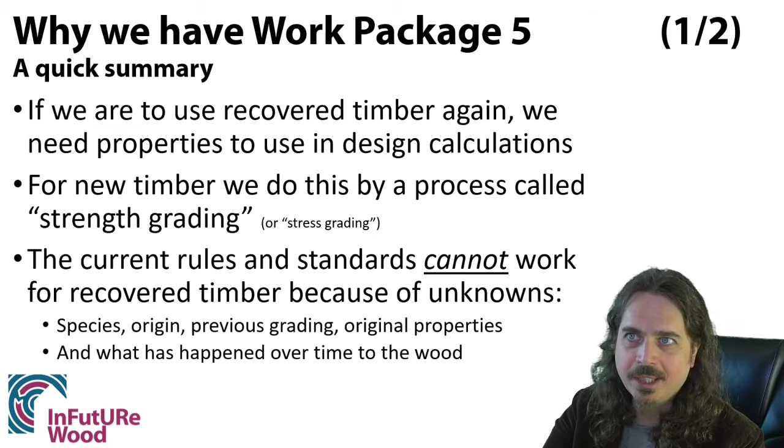But there are some related issues as well. First one is that it's currently very expensive to establish new grading rules for a new species or new source, or even a new grading machine. And this acts as a barrier to get a wider range of different species into the industry. The reason for this is that we require very large testing programs to establish the grading rules.

And if it's a minor species or a small source, sometimes that testing program can be a significant proportion of the wood that we want to use, and obviously that's not an economic thing to be able to do. So at the moment the grading rules that we have are acting as a barrier to get a new, more diverse range of first use timber into construction too.

There's also no current easy way of assessing timber in situ to give values for structural calculations. Now, obviously this happens because we have to do it, but the problem is that it's a bit more of a seat of the pants process than it ought to be. There's no real kind of good framework for it.

Because of that, we have to be careful what we're doing, and perhaps sometimes be a bit over-conservative, which sometimes means that we either can't keep the timber in service, when in reality it would probably be fine, or we have to put in some extra strengthening that might not be needed. So it would be good to improve this whole issue around retaining timber in buildings, because if we have that option, it's probably the best thing to be able to do for the circular economy, is extend the lifespan of the timber that's already being used.

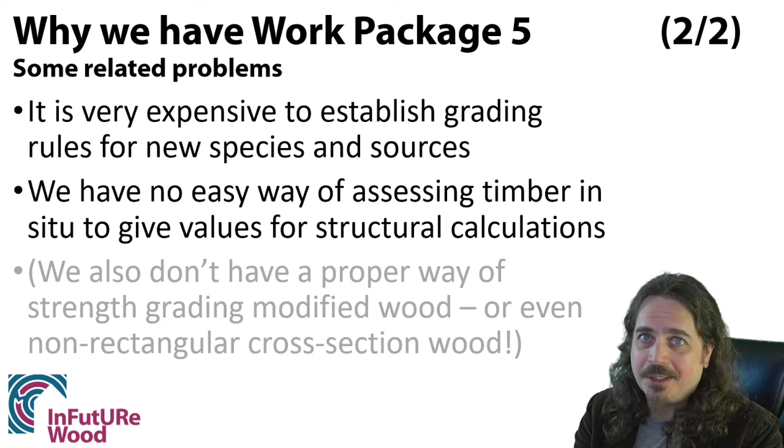So there is on-demand webinar content, and if you're watching this video, then I guess you know about that. And I recorded earlier a video presentation about the other ways in which strength grading can get in the way of the circular economy, including things like increased focus on a smaller number of species and ever decreasing number of strength classes on the market.

I talked a bit about how when you go to these commodity strength classes, you actually discard some of the potential of the wood, and sometimes you're not putting things on the open market and it doesn't actually make sense to discard the timber potential. And how sometimes the whole process of grading makes us think incorrectly about it, and that leads sometimes to over-specification, which is another circular economy issue, in that we're using or specifying wood that is actually way better sometimes than it actually needs to be. So watch that video if you're interested in those topics.

My other colleague at Edinburgh Napier University, Marlene Cramer, has made a couple of videos on other aspects of grading recovered wood, which are touching on things like the more practical issues, and things like the equivalent of visual override that you would need, and the things that you find in recovered wood that you don't find in new wood, like holes, fasteners, notches, non-rectangular cross-section, mechanical breakages, things like that.

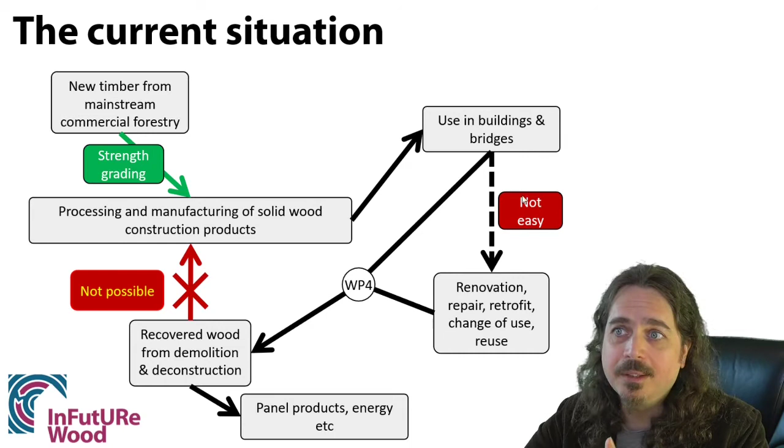And then when buildings and bridges get demolished, the wood is collected at the moment, but it's mostly going to either panel products or energy, because there is no linkage back from the recovered wood to manufacturing of new construction products. So at the moment this bit is missing. This process of grading again the wood or assessing again the wood is missing. And as I said, this process here of inspection, it happens, but presently it's not easy.

So this is the situation that we would like to get to, is to get that linkage in, so that we can take recovered wood from deconstruction and we can assess the properties well enough that we can manufacture new products from it, new construction products, and use them safely. So that's the thing that we want to improve with this work package and this project, is to improve the segregation and grading of secondary wood to get it back into new products that are a higher level than the panel products that are currently going, so that we can extend the service life of the wood, increase the number of cascades in the material cycle.

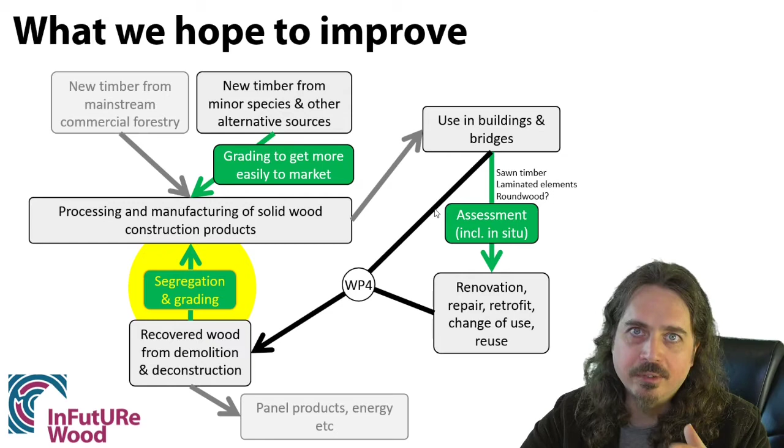And we also want to improve this grading process for minor species and other alternative sources as well. It's kind of a linked problem, and if we can solve this issue down here, then we can probably solve this one too, hopefully. And part of the project is to improve this in situ assessment of wood already in service, so that we can improve it and retain more wood in its first use for longer.

So if you're interested in the topic of in situ inspection, I would encourage you to watch this other on-demand video by my research colleague in Madrid, Guillermo, and he covers the topic of inspection, estimation of properties, calculation of load carrying capacity, and presents a case study. So if you're interested in that topic, I'm not going to talk about it much in this video, so you're probably better off watching that one.

Okay, so a little bit about grades and strength classes and design values. They're not quite the same thing as each other, so let's unpick this issue. So when we grade timber, we sort it into grades, and grades are really just sets of pieces. So we can sort timber into a pile that says this is a good pile, and another pile that says this is a bad pile. And those two piles are called grades. They're just sets of timber. There's nothing else attached to them other than that they're just piles of timber.

Grades are linked to strength classes, so you need to get to a strength class in order actually to have some design values to use in your calculations. So strength class is a special case of a grade. It's a grade with some numbers attached, some description of the properties of the wood collectively in that pile. Now, strength classes, they're a convenient way of listing the design properties, but it's not the only way. You could just list the design properties, because at the end of the day, what you need is the design properties. It's not the strength class.

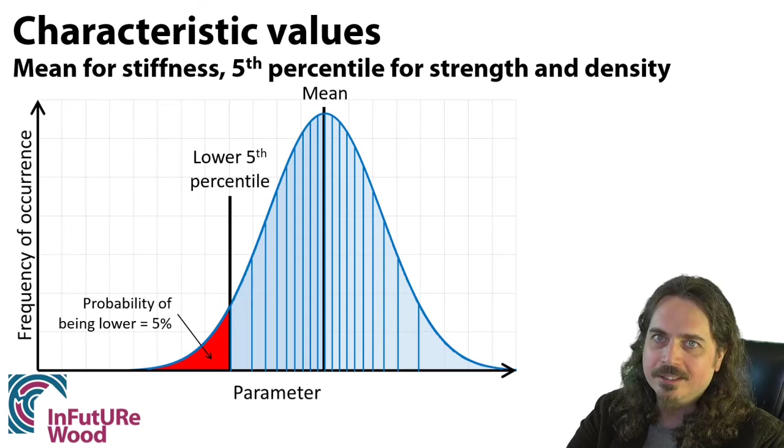So if you're designing timber, you would be familiar with the list of design properties in EN 338, the European standard that lists the properties for the C, D and lately tension classes. There are other strength classes too that don't appear in EN 338, but the main ones are the C classes and the D classes that would be used in construction. That's where you find the properties. And there are three primary properties highlighted in the standard: bending strength, the mean stiffness in bending, and the fifth percentile density.

All of the other properties are called secondary properties, and they are usually estimated conservatively from equations based on the primary properties. And you find those equations in EN 384, a whole bunch of equations that say, given certain strength, density, and stiffness, these are what all the other secondary properties are. That's not quite all of them, so you will find in Eurocode 5 a few other properties that are calculated. For example, from density, you would get embedment strength.

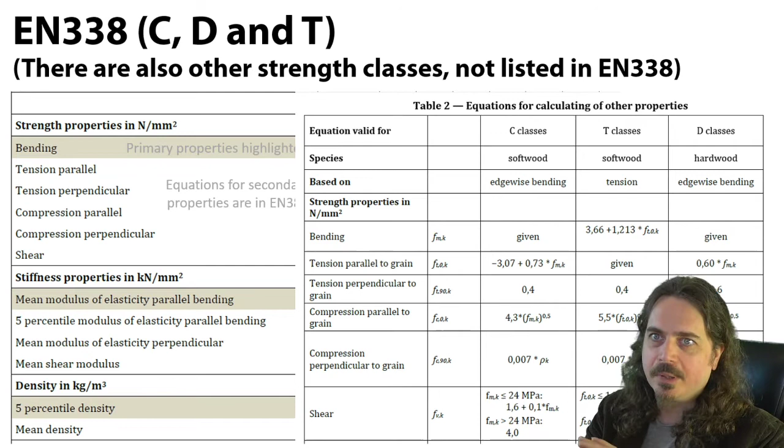So yeah, you've got certain strength classes, and you would just look up what strength class you've got. These are the design values that you can plug into your calculations. Pretty easy to use. That's the whole idea of strength classes, is that you don't need to know where your timber is coming from or what species it is. You can just say, I did this design for this strength class. As long as the timber is this strength class, the design is fine. I don't care where you get it from. So that's the whole point of strength classes for new timber.

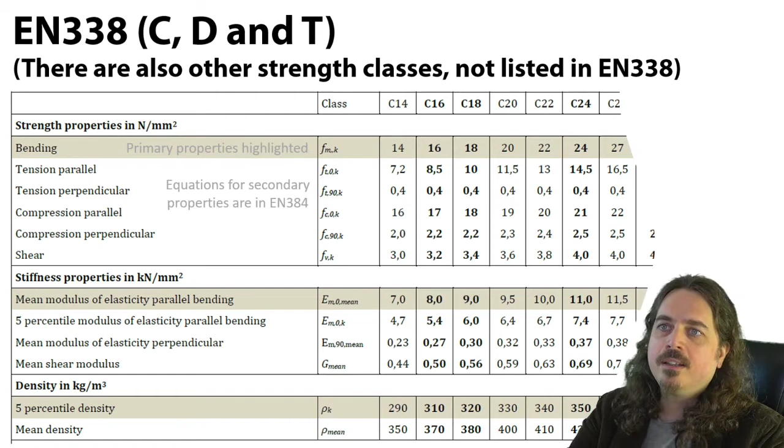So why do we have this problem with the current grading standards? Why are they not suitable for recovered wood? Well, the reason is that the grading standards have to work with the old technology. So everything has to be backward compatible for new timber, because these old machines are still in use in the sawmills. So for visual grading, the rules have to be simple. You're just sorting timber into grades according to specified criteria. You can't adjust those criteria, it's just sorting and applying the rules.

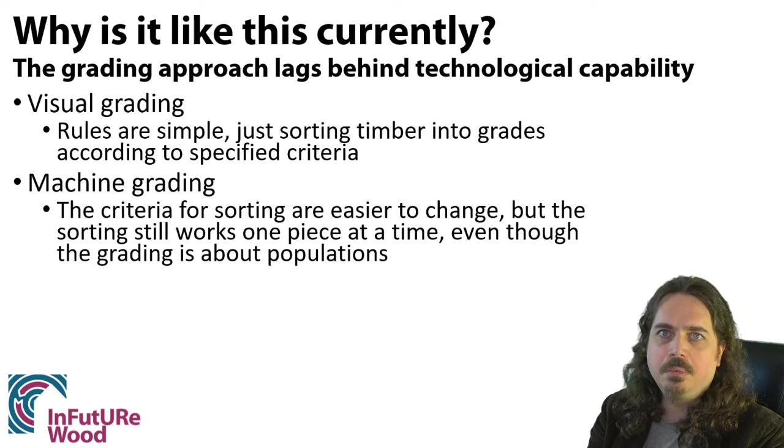For machine grading, the criteria for sorting are easier to change, but the grading still works on a one piece at a time decision-making process, even though the grading itself is about populations. So we have to assume that the machine can't remember what it's previously graded, and like a dumb box, it just applies a rule to the timber.

And the other thing is that this whole system was made for new timber, and actually for timber on the open market when the end use of the timber is not known at the time that the grading is done. And every bit of the standard is written for this whole purpose, and it's really about ease of trade primarily. So that's why we have these commodity strength classes, to make trade easy.

Now, I talk a bit more about when it makes sense to use commodity strength classes and when it doesn't in this other document that you can find on the on-demand webpage, a conference paper from 2016 that gets into that topic a bit more.

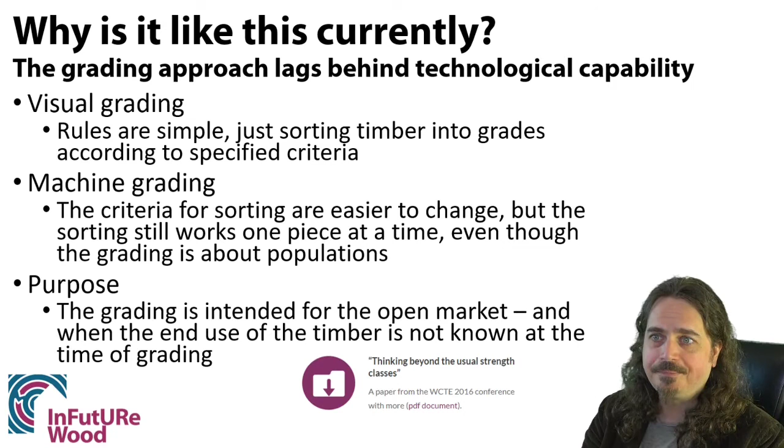Okay, so let's look at a very simplified example. If you know about grading, then you will immediately see how overly simplified this is, and some of the things that aren't quite right. If you don't know about grading, it's already going to be complicated enough. So I'm not really going to get into the ins and outs of how this differs from real grading calculations. So let's just say this is a very simplified example and just take it from there.

So this is real test data that we're looking at for UK grown larch, almost 650 full structural sized specimens. So that's timber with knots, grain deviation, like typical sawn timber that you would want to use in construction. We've got three graphs here. The first one is plotting whole board density against bending stiffness. The second one is plotting whole board density against bending strength, and the third one is plotting whole board density against density sample density.

Now, I'm going to use whole board density as the grading criteria, the indicating property, the IP, because everyone thinks that density is a really good indicator of timber quality, and it isn't. So I want to illustrate that. In real grading situations, you very rarely use simple density as your grading parameter because it doesn't work very well. There are usually better ways of doing it. But I'm going to use whole board density just to show you how well or not well it works for new timber.

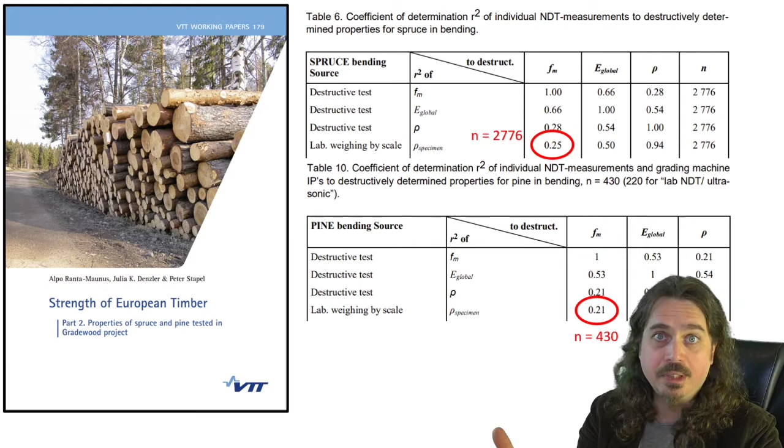So the first one, spruce, there were 2,776 specimens tested, so there's a big testing program, and the correlation between the whole board density and the bending strength is down at 0.25, so quite similar to what we saw with UK grown larch. Smaller data set for bending in pine. It was only 430 specimens, but you can see again the correlation between the whole board density and the bending strength is pretty low, down at the 0.2 level. So nothing weird about UK grown larch here. The fact that there's very little correlation between whole board density and bending strength is expected, actually.

Third one, you might be wondering why isn't there a perfect correlation between density and density when there should be? The thing to realise here is that for strength classes, for assigning grade, the density is the density of a small sample of clear wood taken from the board, which will differ from the average density of the whole board. So there is a slight difference between those two things, which is why we don't see a perfect correlation here.

So one is whole board density, the thing that we're using for the grading decision in this simplified example, and the density that we use to decide on design values, which is the density sample, the clear wood density. But it is a strong correlation, R squared of 0.84, so the correlation between the density sample density and the whole board density is pretty good.

So if we don't do any grading at all on this timber, we could just calculate what our characteristic values are. So what strength class would this correspond to? Well, the mean stiffness is 9.69 kilonewtons per millimeter squared. I seem to have forgotten to put any units on this slide, which is very bad. Stiffness 9.69, which would be enough for C20. The 5th percentile strength is 21.8, which would be enough for C20, and the 5th percentile density is 408, which would be enough for C40.

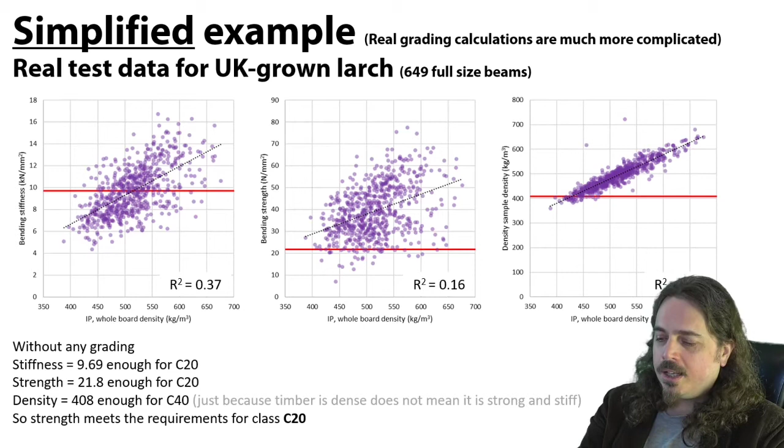So yeah, if we don't do any grading, we would be getting C20, which is not far off what the real grading calculations come out for ungraded UK grown larch. It does come out to about C20 if you don't do any grading to it. But let's do some grading here. Let's say that we will only accept boards that are denser than 460 kilograms per cubic meter, and we'll reject every board that is less dense than that. So this is a grading threshold, 460 kilograms per meter cube.

Now if we do that, we get rid of some of the lower stiffness pieces because there is that good, or reasonable, correlation between density and stiffness. We get rid of some of the weak boards, but because there is hardly any correlation between board density and bending strength, we don't do a lot to the strength. And then for density, because we can almost directly grade for density, we do get rid of a lot of the low density pieces.

So let's look at how that's improved the characteristic properties. Well, we've raised the mean stiffness by doing this. We've raised it to 10 kilonewtons per millimeter squared, which is enough for C22. The 5th percentile strength we've raised to 22, which is also good enough for C22. The density, we've raised it, and now it's good enough for C50.

But if we are assigning this to a commodity strength class, then we have to use C22, even though the density is higher, because it's, again, limited by the strength and the stiffness. So by doing this grading process, by getting rid of the least dense boards, we have improved the design values for our timber from C20 to C22.

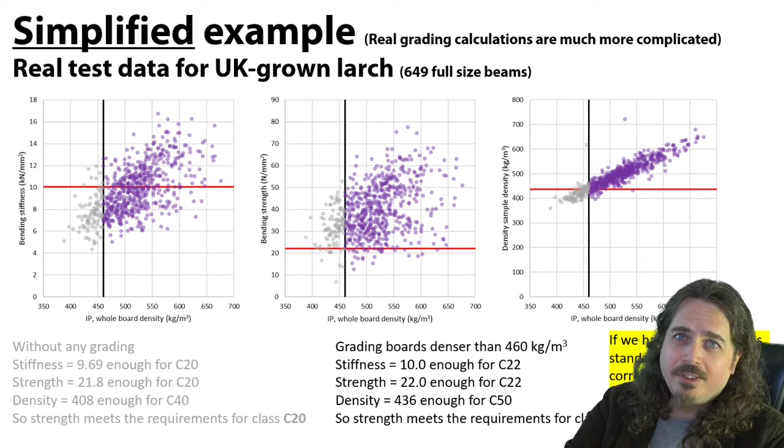So that's a very simplified example of how we would grade new wood. What would happen if some other process had taken away the densest boards? What would happen if we didn't actually have any boards denser than 550 kilograms per meter cube? They were missing from our data set. Something had happened. They'd been graded out, or they'd been sorted. Some process had removed them.

Now, we would lose actually some of the very stiffest pieces in our data set. They would have disappeared. We would also lose some of the strong pieces, but again, because the correlation between board density and bending strength is not high, not a lot has happened to the strength. And we would lose the very densest pieces as well.

So if we didn't know about this and we applied the same grading threshold as we did before, we wouldn't actually be achieving the properties that we thought we were. So the mean stiffness would be, instead of 10, it would be down at 9.42 kilonewtons per millimeter squared, which is not suitable for C22, it's only suitable for C18, so it's actually worse than it would be for a

complete ungraded population. The strength is also reduced a little bit, not by much because of this poor correlation between density and strength, so that's reduced, and it's now down at the C20 level. So we thought it would be C22, but in reality it's only C20. And the density, not much has changed to the density, even though we have lost those very high density boards.

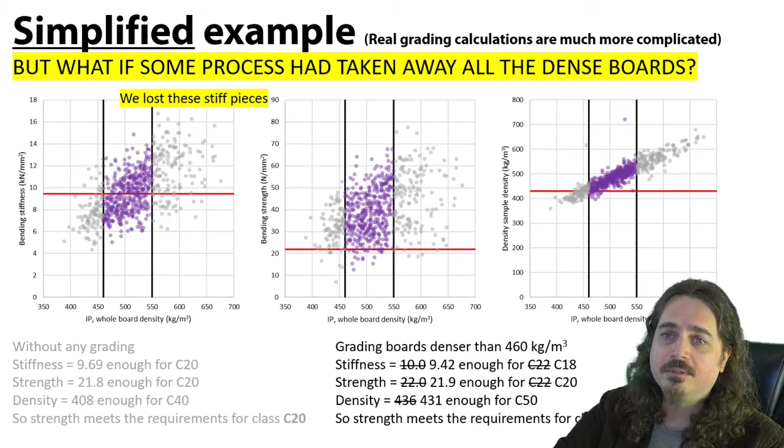Now, key thing to remember about the properties or the things that we use for making our grading decisions. There's a whole list of things that we can use, like ring width and knot size, stiffness, a whole bunch of things that we can use as grading indicators. And they are correlated with the properties that matter.

So when we're talking about structural grading, it's not knots per se that matter, it's the strength and the stiffness and density that matter. So knots, we know they affect strength. So there is a correlation there between knots and strength, and that's why we can use knots as a grading parameter. So there's the correlation between, for example, knots and strength. But there are other correlations there.

So actually, strength, stiffness, density, they're probably more determined by how the trees grew and how they were processed. So the forest management and the climate and the local situation, because the trees are growing wood for their own purposes, and they'll grow wood with properties that suit their needs at that particular time. So actually it's the growth conditions and some aspects of processing that determine most of the mechanical properties. And they also determine the grading characteristics.

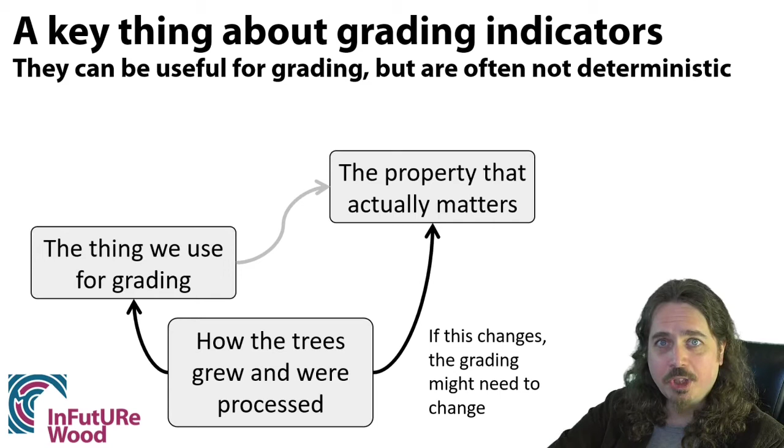So in reality, this link between the grading indicator and the actual property that we're trying to grade is not as strong as people think. And if anything changes in this original population, if we change the growth conditions, if we change the seed source for our trees, or the climate changes, then that potentially can also change the way that the grading has to work. So that's why there might be different relationships for old wood compared to modern wood, because the growth conditions were different in the past from how they are now. So we can't do a testing program of new timber and necessarily expect the same result for old timber.

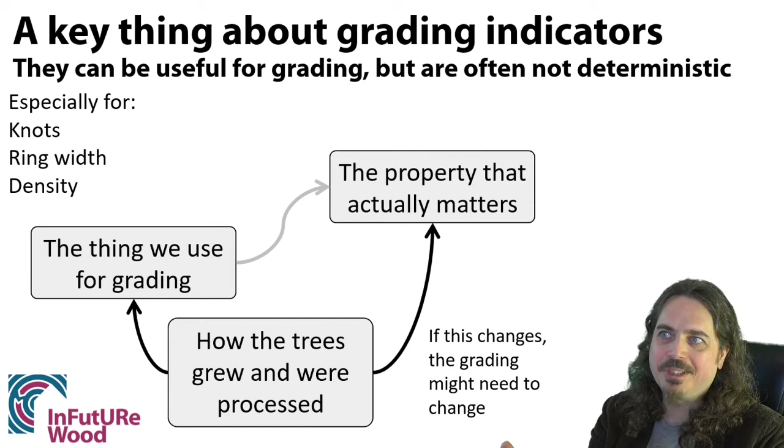And this is especially true for knots, ring width and density. So those properties which are key to grading, or many types of grading, because we use them so much, we think they do determine the strength and the stiffness, but in reality a lot of that is determined by the growth conditions and not necessarily per se by the size of the knots and the rings themselves. It's just that both of those things are correlated with growth conditions, and that makes them possible to use in grading, but also means that those relationships don't transfer from one species or one growth area to another.

Now, we might have a simple solution here because we do have grade stamps on timber often. So, if you had some timber and it came from a building, could you just look at the grade stamp? Is that okay? Well, maybe, but there are a few things that we need to consider. Firstly, maybe it won't be readable. You've probably all been to a timber stockist and struggled to read some of the brand new grading stamps, never mind ones that have been in buildings for years and got covered up in dirt and other things. So you can't necessarily rely on the grading stamp because you might not be able to read it.

And probably, if the timber is old enough, that grading stamp will relate to old standards, and it might not be easy to transfer that old grade stamp, what it meant, into a new design code. So the grade stamp might relate to, for example, a permissible stress design, and you might want to use a Eurocode 5 limit states approach. It means that you then have to somehow translate the design values from one code philosophy into another, which is not necessarily easy to do.

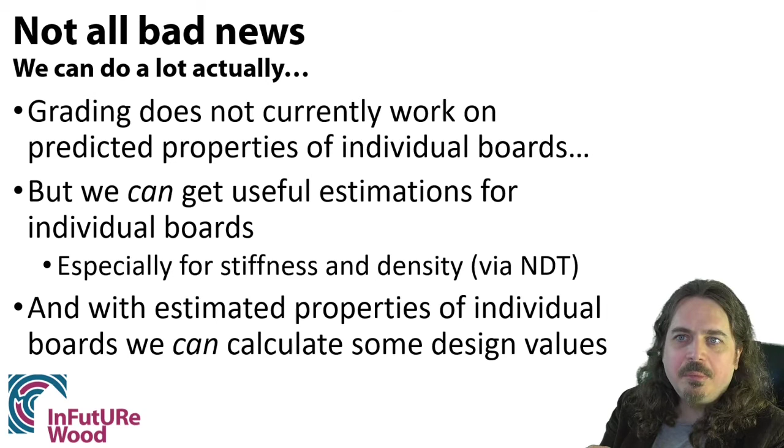And we could use those estimated properties of individual boards to calculate some design values. We could do this. It would be hard for strength, but for stiffness and density we could probably do it pretty well. Okay, I'm going to try and explain this. It's a topic that I've been thinking about for a number of years, but probably don't have a good way of explaining it yet.

But let's go back to an example of whole board density versus bending stiffness. If we've measured a board and it's 500 kilograms per cubic meter, we know from that previous study that there's a linear relationship, and we can use that linear model to estimate the bending stiffness. And we can use the standard error to calculate a probability distribution, a prediction interval for that board. We can say there's an X% chance that this board has a stiffness of this. And we can do that for every single board that we measure.

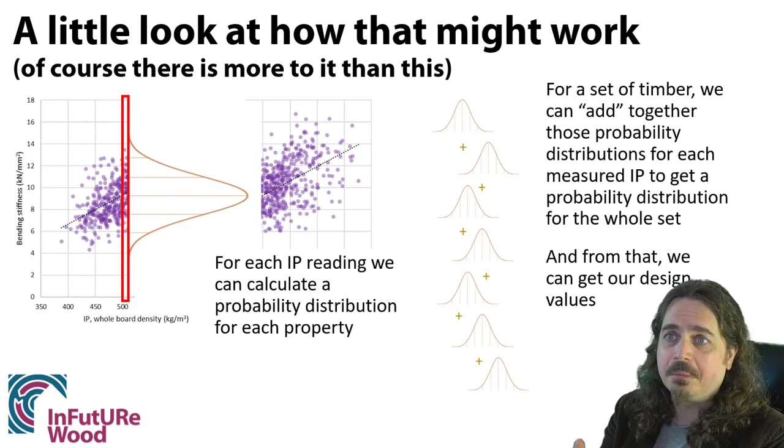So for every indicating property that we measure, we can make a probability distribution for the property. Then we can add together those individual probability distributions and get a combined probability distribution for that particular set of timber. From that combined distribution we can calculate some design values: an estimate of the 5th percentile density and strength and the mean stiffness. Statistically we can do this. We probably need a bunch of extra adjustments to allow for the certainty that we need in engineering design, but in principle this should be possible. We can measure bits of wood, get estimates of properties, and get some design values.

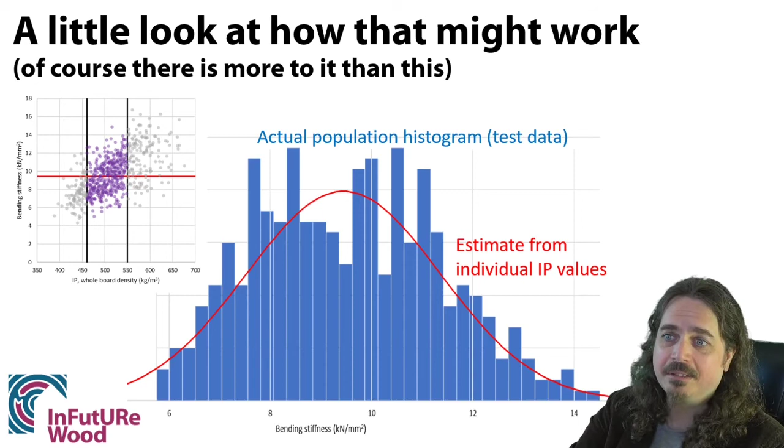It's certainly better than it was when we were just using this simple grading approach and we had assumed that we have everything in the population above 460 and we didn't know we were missing that 550. So this individual board basis process would work better in that situation. So it's not bad. Of course, in the real world there's a lot more to it than this, but in this simple example, that seems to work reasonably well.

But what would happen if, unbeknown to us, something had also removed all of the strongest boards? So all of the boards that had a bending strength above 50 newtons per millimeter squared were somehow missing. They'd gone missing. They weren't there. So when we were grading, we were taking all the boards with a density above 460, but we were missing the ones that were strong, and we were missing also the ones that were denser than 550.

So remember back, we thought we would get C22, but because we're missing the densest boards and the strongest boards, the stiffness is reduced even further from 10 down to 9.06 kilonewtons per millimetre squared. So we thought we were getting C22, but the mean stiffness is only good enough for C18. And we've also knocked down the strength. Because we're missing the strongest boards, the strength has gone down, but not much further than it had already gone down from not having those dense boards. And nothing much has changed from the density because of this poor correlation between density and strength.

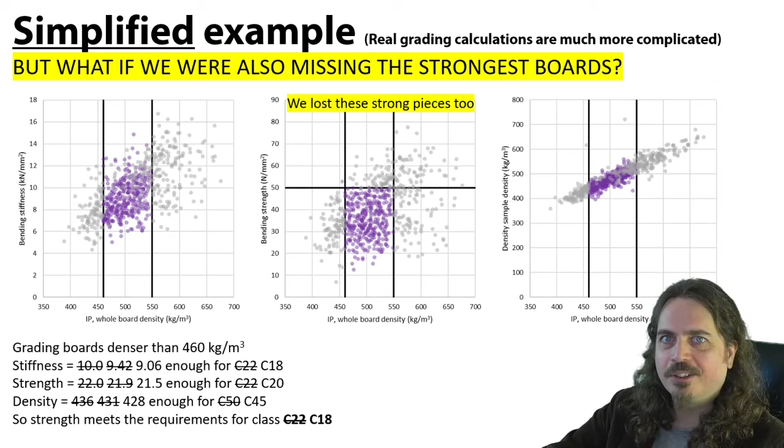So if we're going to use this individual board basis of grading, then we need a way of detecting if there's something missing and adjusting for the fact that it's missing. So we need a better idea than the one that I've outlined here, but it's a stepping stone to how we might approach this.

There are a bunch of other open research questions. First thing, what do we do if the cross section isn't rectangular? How do we grade it? This would include not just notches and things like that, but what if it's got excessive wane or a groove cut in the length? How do we grade it, and how do we come up with some design values?

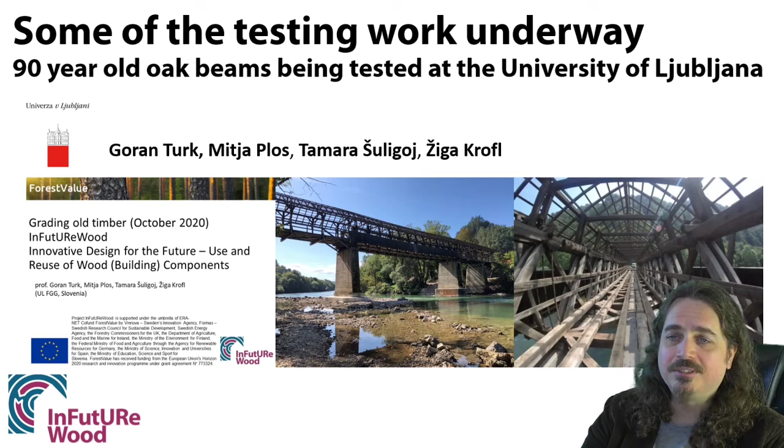And colleagues at the University of Ljubljana have also made a video on this. They've been testing some timber, recovered timber, and they've made a video in the on-demand video section for the webinar. So if you're interested in testing of recovered wood, then I encourage you to watch that video from the colleagues in Ljubljana. It's got some videos of the testing in as well, which is great.

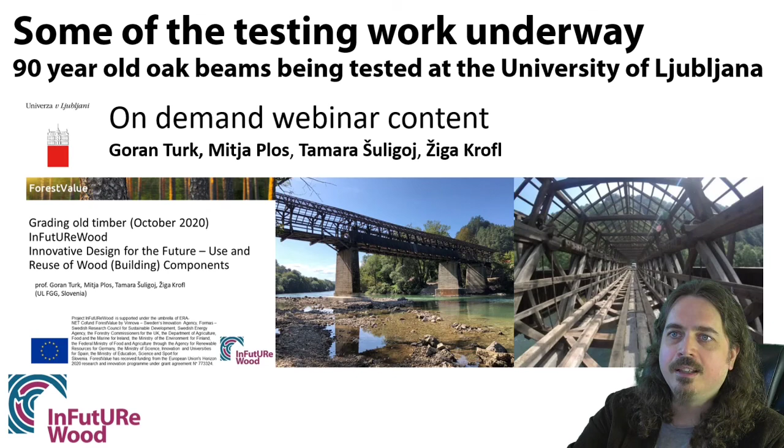And they talk about applying visual grading approaches, like measuring knots, and applying also machine grading approaches, different acoustic technologies, resistance drilling, that sort of thing. So they're making a bunch of measurements on this old timber to see what works and what doesn't work. And they've tested the timber, or are still testing the timber, and it will be interesting to look at the data when that's finished and been processed.

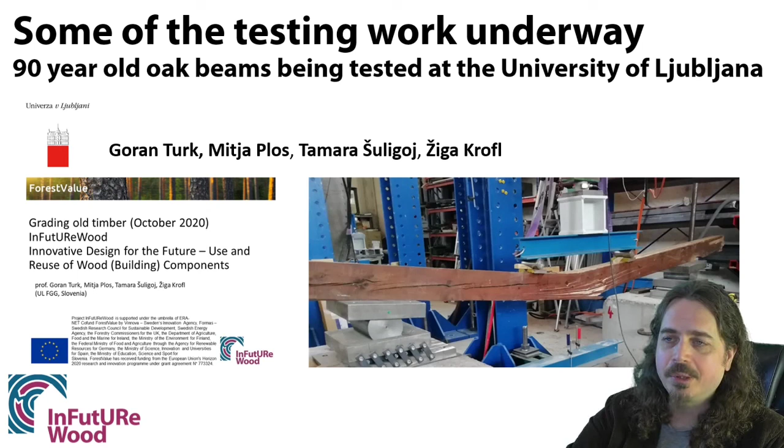So what we're going to discuss actually in the webinar, well, probably you will know by now if you were in the webinar, because this will have happened by the time you watch this video, but the first question that we have is, well, what situations are realistic? We're talking about grading of recovered timber as if it was actually practically possible.

At the moment it's not economic, there's no question about that. You can get new wood cheap enough that no one would mess around grading recovered wood unless you had a particular need to do it. But the current economics aren't necessarily going to apply in the future. Things might change about the supply and the price of wood, and maybe legislation as well. So what situations are realistic for wanting to grade recovered wood in the near future and in the longer term?

And I'm thinking in the longer term particularly about all of these massive wood CLT buildings that we're building, the huge quantities of wood in those buildings. What will happen at the end of life for those buildings? It would be probably pretty wasteful to just chip up those huge slabs. Maybe something can be done to grade, not necessarily timber sawn from those slabs, but maybe assess the properties of the slabs and the glulam so that we can reuse them in another building.